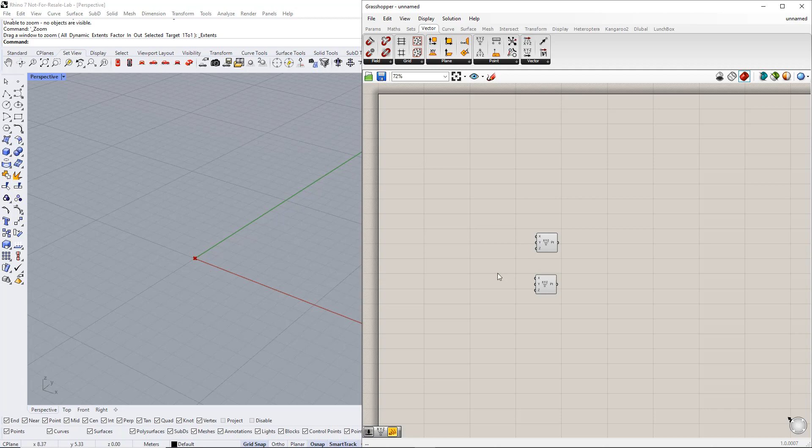For the second point, we set up a number slider to the x-coordinate, so that it can be easily adjusted later with the slider. We insert the number slider command from the Params tab and then double-click on it to change the lower and upper limits of this slider. We enter number 1 for the lower limit and 30 for the upper limit.

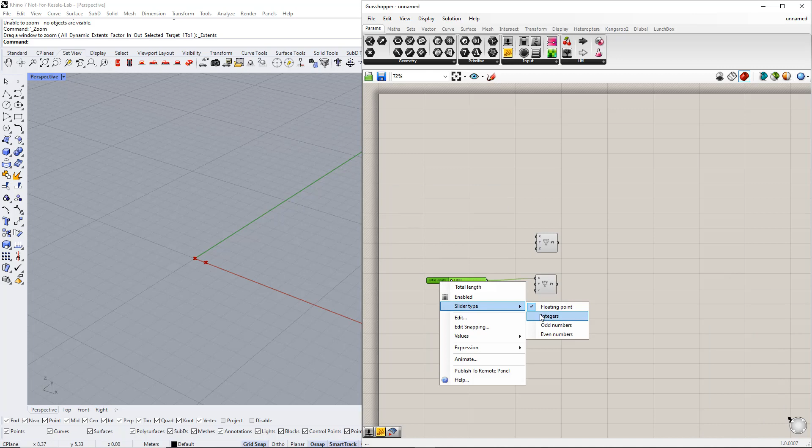We also enter a name for this slider, and for that we write total length. By right-clicking the slider, we can select the slider type, floating point, integers, etc. For example, we select integers.

After that, we create a line between these points using the line component. As you can see, when we click this line, it is colored green.

Next, we determine the middle point of this line using the curve middle component, which is in the Curve tab.

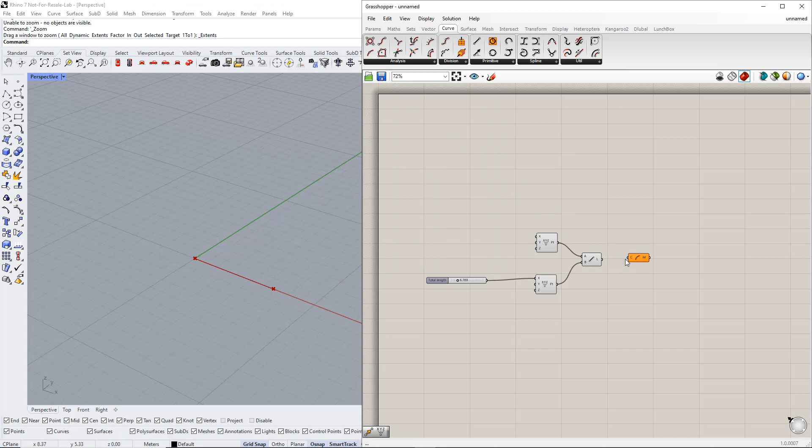In the next step, we copy these points using the Move component. You can find it in the Transform tab or double-click the canvas and write Move.

Now we start to copy these points in the Z direction. First, we copy the base points. As you can see, by default this value is 1 and in the Z direction.

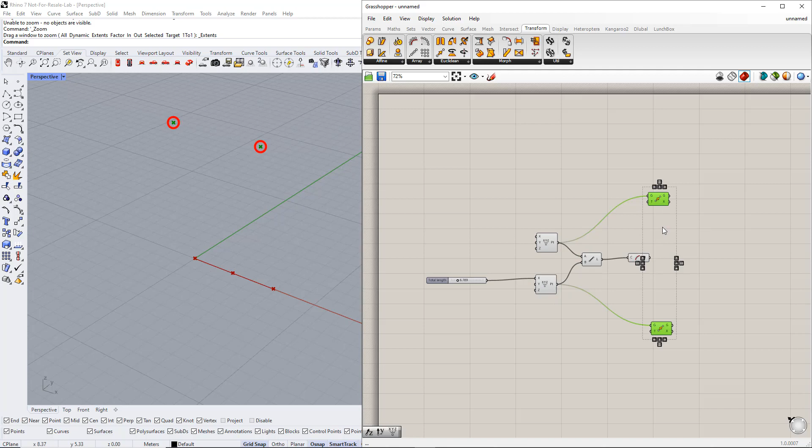We need to insert the unit vector parallel to the Z-axis by using the Vector tab or by double-clicking the canvas, writing Z, and selecting this component.

We set up a range, for example, from 1 to 5. For this, we need to create a number slider. We can do this by double-clicking the canvas and writing 1, point, and 5. After that, we enter side height for this slider name.

For the third point, the middle point, we repeat the same procedure, but regarding the value in the Z direction, we insert the expression component.

Double-click the expression component to open the expression editor and change the expression to x plus y, where x is the side height and y is the apex height.

For this, we set up a range between 0 and 5. After that, we enter apex height for the slider name.

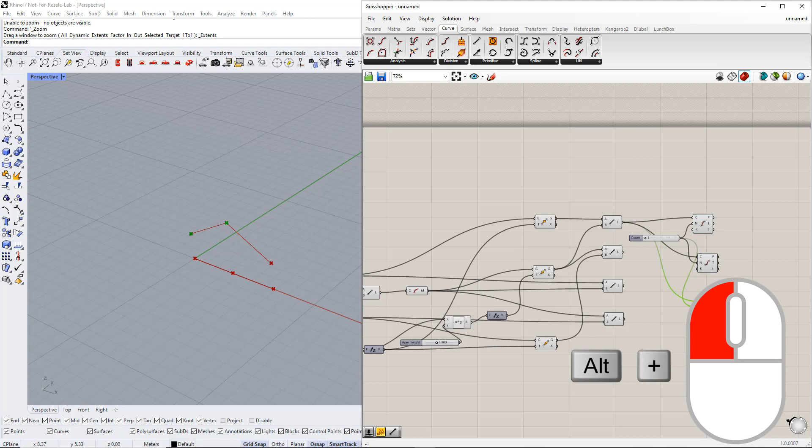Now we create the verticals as well as the diagonals. We begin with the verticals. First, we need to determine which points will be connected to each other.

We connect the points of the first line from the lower chord to the points of the first line from the upper chord. We start with the first lines from the lower and upper chords, as you can see.

For the second lines from the lower and upper chords, we do not need to consider the first point, because it has already been considered.

For this we utilize the Cull Index component. You can find it in the Sets tab or by double-clicking the canvas, writing cull, and selecting the component from the list. By using this component, we can choose a specific item to remove from the list.

Now we need to determine which item will be removed by using the number slider command. For this, we enter 0, 0, which refers to the first point of a list.

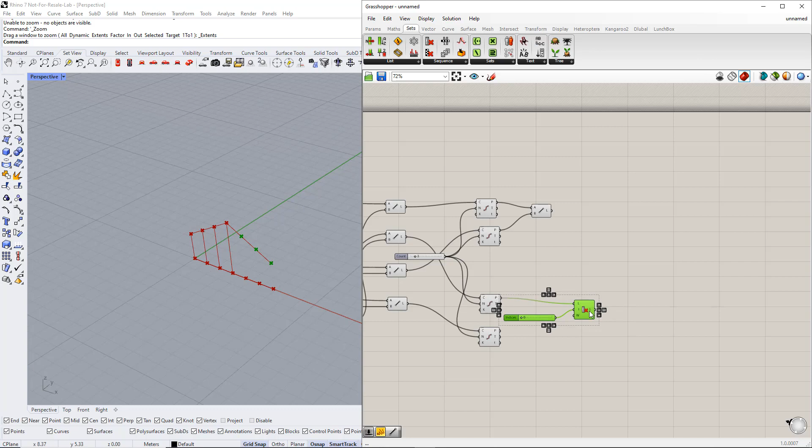We repeat this for the points from the lower chord. Afterwards, we connect these points to each other using the line component.

We group these lines by hitting Ctrl+G and writing verticals for the name. Next we create the diagonals.

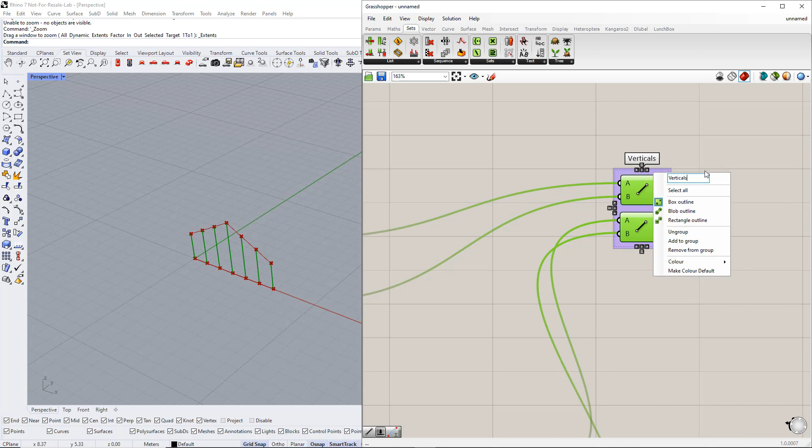As you can see, we connect these points in this pattern. Therefore, we do not need to consider the first point from the lower chord, the last point from the upper chord.

We can call them using the Cull Index component. For the first point, we have to enter 0 as index, which refers to the first point of a list. For the last point, we have to enter -1 as index, which refers to the last point of a list.

We can add the -1 to the range by double-clicking the slider and changing the lower limit to minus values. Now we create a line between these points using the line component.

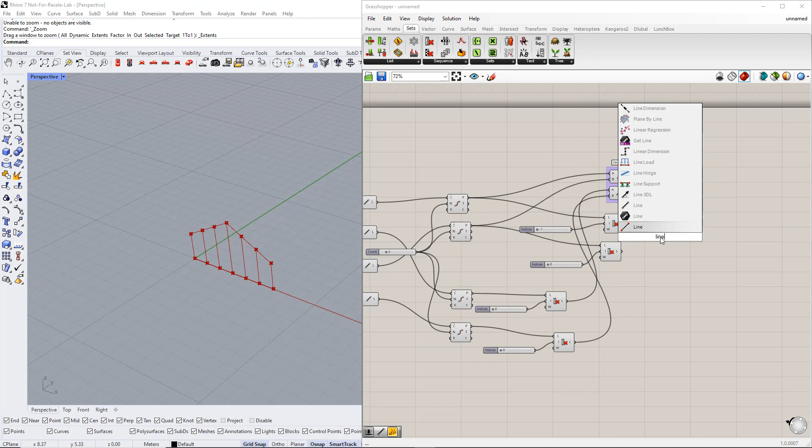We repeat the same procedure for the other side. Then we make groups and enter names for all the groups, as you can see.

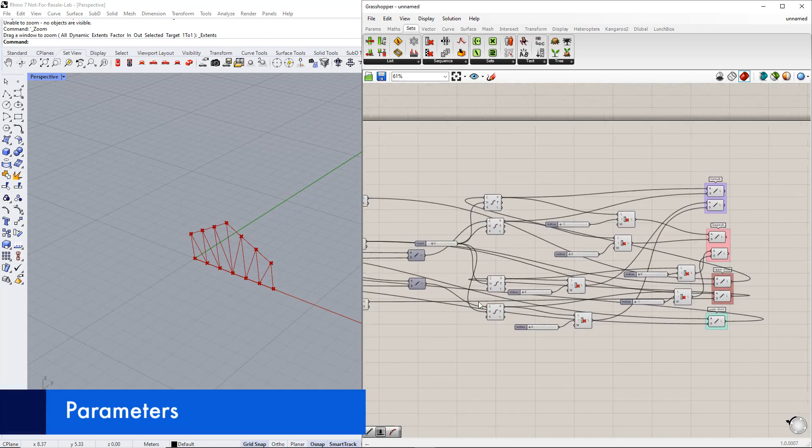Next, we put all the number slider commands together in a group to control all the parameters easily.

In the next part, we create members for these lines. We insert this component from the Dlubal tab. We also need to define the member type using the valueList command. For this example, we select the beam type.

After this, we connect the line components to the grasshopper line in the member component.

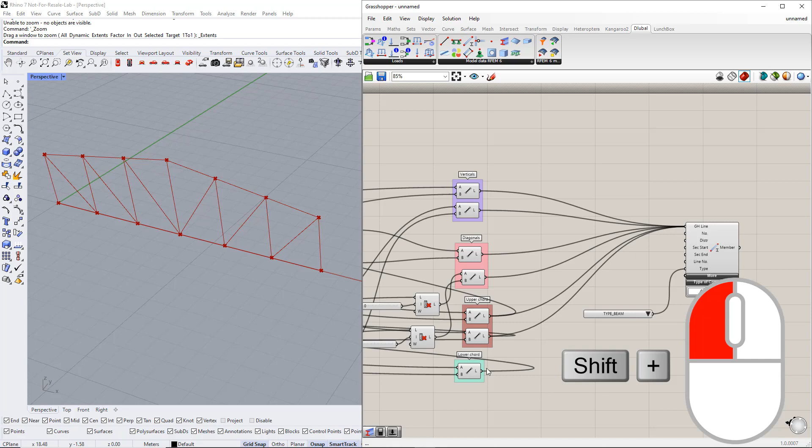In the next step, we define the cross-section as well as the material. For this, we insert the Dlubal components, section, and material. Next, we insert the panel command to enter the properties of the section and the material. Now, we enter these properties.

For the cross-section, we enter 1 as the section number, and R, M1 and 120/120 as the cross-section name. For the material, we enter 1 as the material number, and C24 as the material name.

Make sure that you use the correct RFEM terminology. Only then is it possible to export the elements correctly into RFEM.

Afterwards, we connect the material component to the material number in the section component, and connect the section component to the section start in the member component.

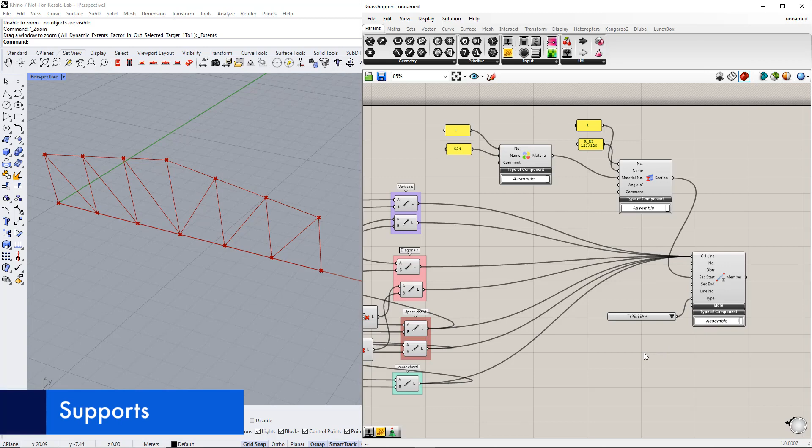Next, we define the supports. For this, we insert the nodal support component from the Dlubal tab.

For the first node, we would like to create a hinge support using the panel command. As we mentioned in the first example, 0 means free, infinity (INF) means rigid, and in between, with a specific number, means spring. Then, we connect this panel to the respective support conditions.

We repeat the same procedure for the second node but with other conditions, because we want to define the sliding supports.

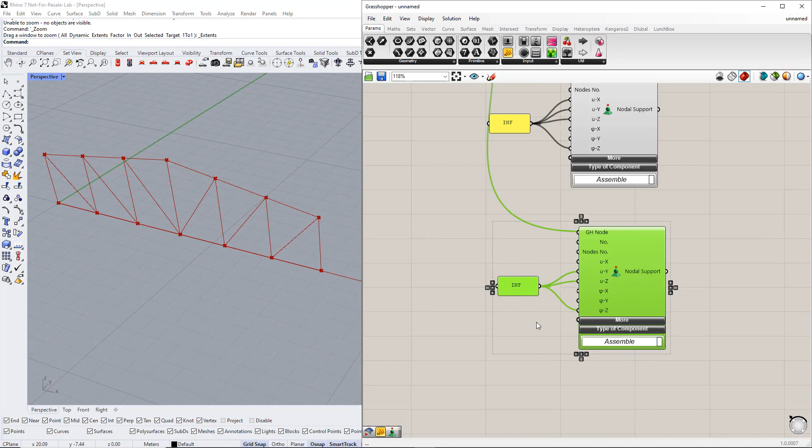To transfer this model data to RFEM, we need to insert the Dlubal component, RFEM6 export component.

To start the export, we utilize the button command from the Params tab for this example. As we did in the first example, we can select units using the value list command.

We can also overwrite the previous data in RFEM using the Boolean toggle command. This means all data in RFEM will be deleted before the export, once we switch to true.

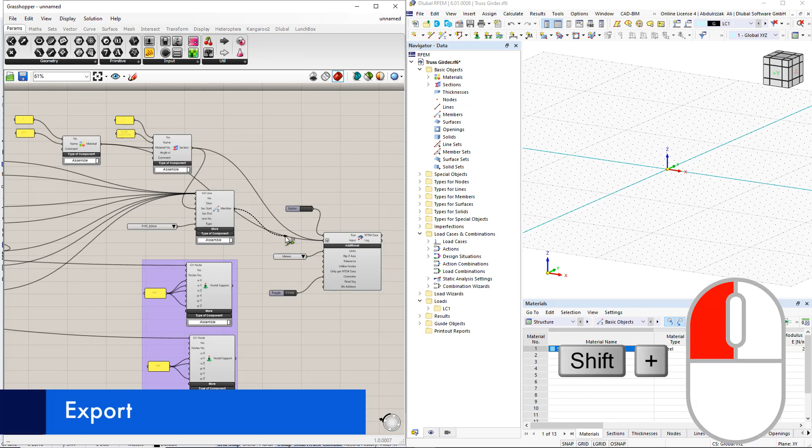After connecting all the components to the RFEM6 component, we double-click the button command to perform the export.

All changes to the parameters in Grasshopper now have a direct impact on the RFEM model.